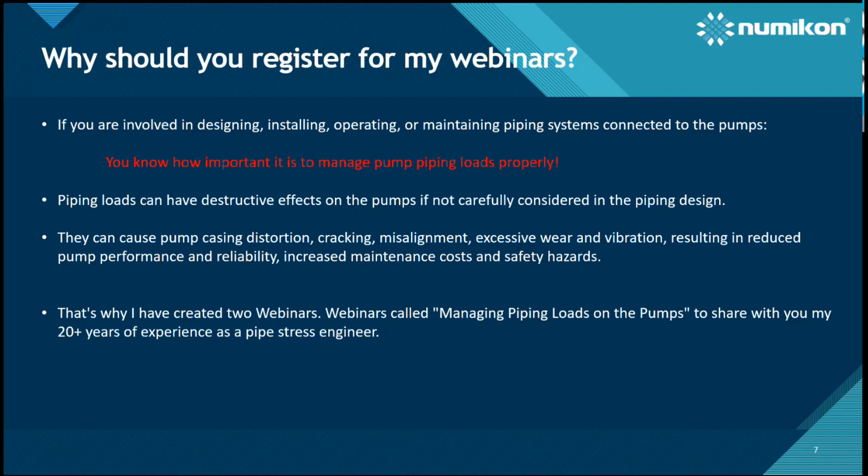Shortly about myself: in the past I worked in ABB, Alstom, and the Croatian company Končar. Since 2007 I'm running my own company called Numikon. My colleagues and I work together on a lot of projects for different international companies such as GE, Siemens, the Swedish company AFRY, the Italian company Danieli, Inca Fixing Systems from Turkey, Innospring from Switzerland, TÜV Nord Adriatic, and a lot of other companies — I mentioned only the most important for us. I'm active as a trainer for different trainings related to piping design and pipe stress analysis. I'm also a trainer and instructor for Caesar 2 trainings, from static to dynamic, and also for some advanced Caesar training. And I also provide technical support, consulting, and coaching for Caesar 2. So these are my, let's say, my background.

In these webinars, what I'm preparing for you, what you will learn: you will see what piping loads are and why they are important for pump performance and reliability. You will see different sources and types of piping loads acting on the pumps. It's not only one type of load - there are different types, sometimes acting against each other, which additionally complicates our life. We will see how to perform pipe stress analysis using different input data analysis software.

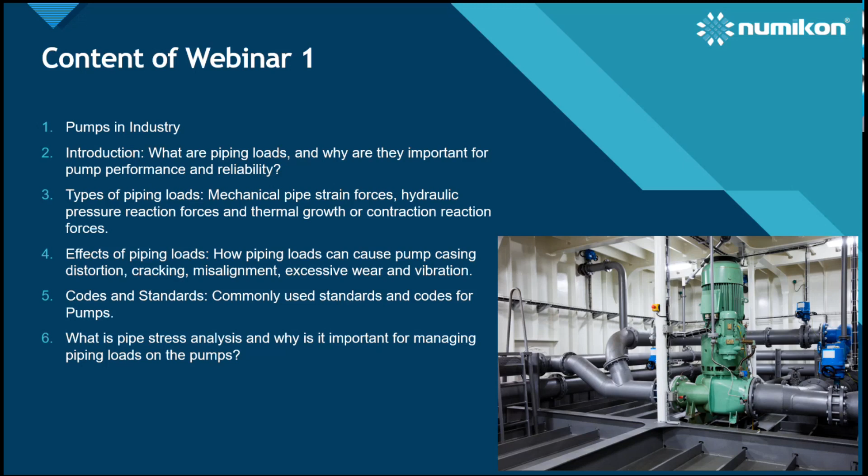Also, we will talk about what pipe stress analysis is and why it's important for managing piping loads on the pumps. So this is, let's say, a rough content of the first webinar. In the second webinar, we will see methods of piping load analysis, how to use piping analysis software to calculate piping loads and to evaluate the loads.

One thing here is the following: I will talk about why pipe stress and flexibility analysis is important for the piping connecting to the pump, even if the piping or the medium inside the piping has very low temperature. Why is this important? Because pipe stress and flexibility analysis will help us calculate and get an idea about the loads which we will transfer to the pump.

Nevertheless, temperatures are very low, and maybe a formal analysis using some kind of software is not required. But at the end, pipe stress and flexibility analysis is the best way to get more realistic results on the connections. Of course, to get more realistic results on the connection, we also have to take care how we make the simulation, how we prepare the model, how we build the load cases, etc.

So all this is what we will talk about. Also, I will talk about strategies for piping load management: how to use proper piping alignment, how to properly support, how to properly restrain the pipe, what to do when we have to use expansion joints or flexible couplings, and things like this. All of this will actually be covered with some examples.

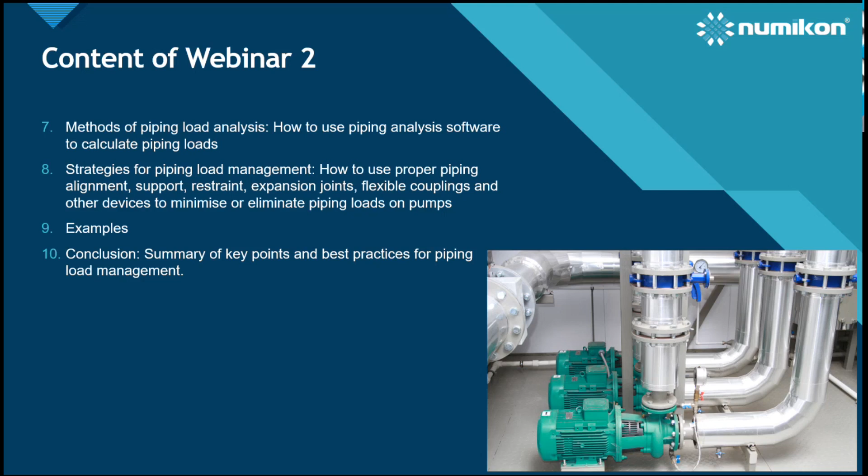And in conclusion, there will be a summary of key points and best practices for piping load management. Okay, so the question is: why is checking the pump nozzle load important?

Just to talk a little bit about the importance of checking the loads. When designing or calculating piping systems, stress verification and comparing calculated stresses with maximum allowable values is not the only thing we have to do as a pipe stress engineer. So stresses are not the only thing we have to do. We also have to check displacements, and we have to check loads on supports, but also, in this case, loads on the pump.

So here on this sketch, you can see that we have some margin, and with all the results we have to stay within it. If we satisfy, for example, stresses and loads, but we did not check displacement, we cannot say we did our job. Or maybe we satisfy the stresses and displacement, but we have to satisfy the loads too. So we can say the pipe stress analysis is complete only if we satisfy all three of these things.

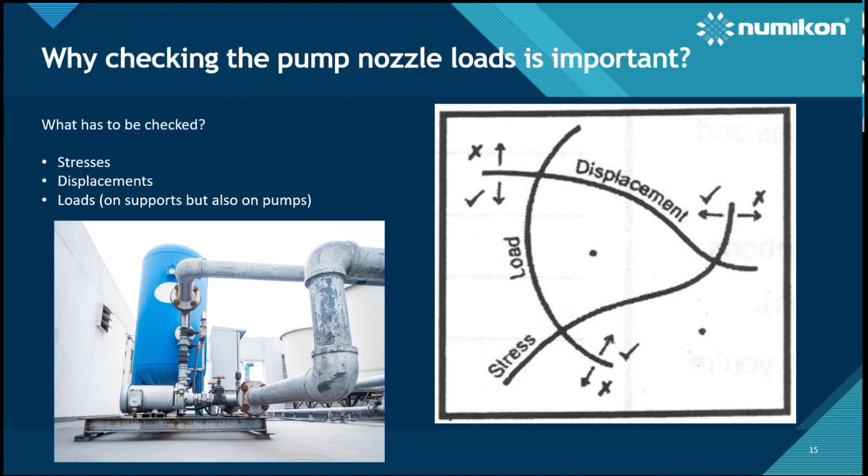Checking the load on the connecting pump puts, in most cases, a more significant challenge ahead of us than solving just stress problems. Experience has shown that in most cases we have more issues meeting the requirements for the maximum allowable loads on the pump than solving the stress issues. We will see an example. Maximum allowable loads, as I said before, are defined by different standards and codes, and also by pump manufacturers.

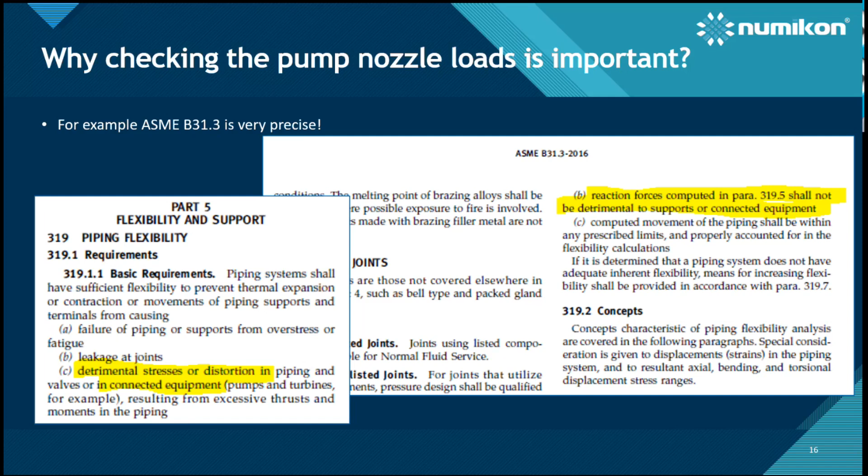Also, the reason we have to check the pump loads is that, for example, ASME B31.3 is very precise with the requirement that we have to take care about reaction forces on the connections, on the supports, but also on connected equipment. So piping standards are pretty precise regarding what we have to consider and what we have to check.

As I already said, load verification poses a greater challenge to the designer than stress verification. As a good example, we have one table here, which is prepared based on API 610, a standard for centrifugal pumps. And what we have in this table is for different pump connections.

So for pipe size or connection size, we have 3-inch, 6-inch, and 16-inch connections. And here, what we have are the stresses in the piping when we apply the maximum allowable loads defined for certain connections. So for example, if we have a 16-inch pipe and we perform the analysis applying the maximum allowable load on the connection, what we will find is that the piping stress is only 7% of the allowable.

So you can see that the piping where we are, even though we have very low stresses, we are already at the edge of allowable loads. This is a good example of why checking the loads on the pump is important, because stress results alone don't give us enough information to say if this is okay or not, since we will have more problems solving load issues than stress issues.

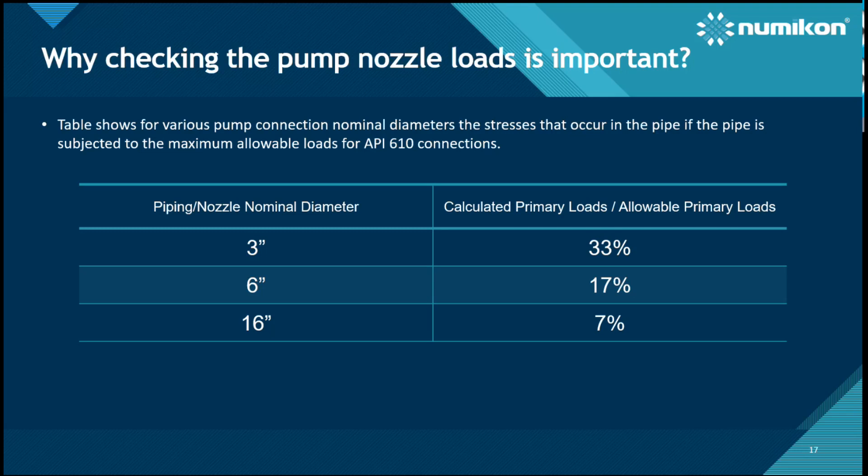Let's see this through one example. We have a simple example of pump piping connected to the pump, and also on the other side connected to a vertical vessel. If we perform the analysis and check the stresses, we can see that the maximum sustained stress is around 5% of allowable, and maximum expansion stress is around 29-30 percent.

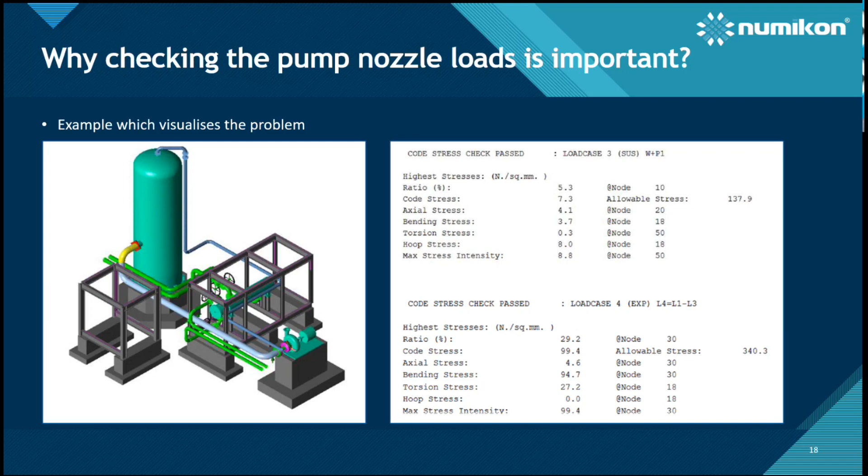But when we check the loads on the pump, we see that we have a problem. If we perform a load check for this same piping according to API 610, it shows that despite the stresses being very low, the loads are far above the permissible values. Checking the forces, we are 6 times above allowable, and checking the moments, we are more than 12 times above allowable. It's clear we cannot say this piping meets all requirements if the loads on the pumps are too high.

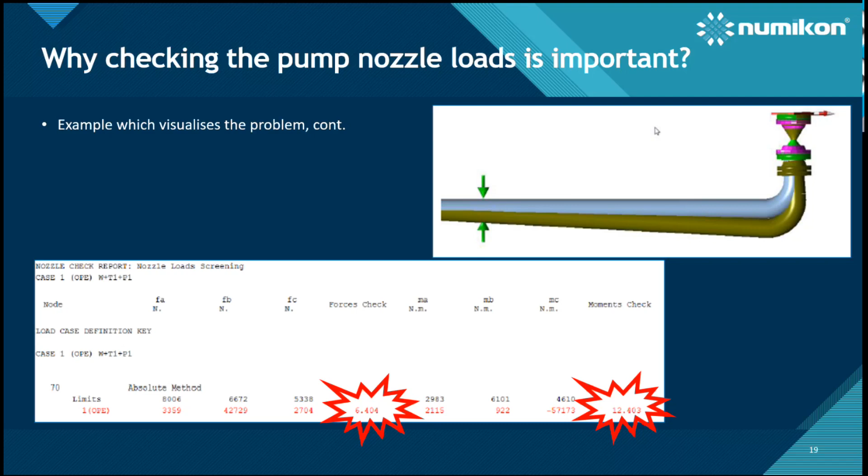It's important to mention that this check is only a screening check, it is not a real API 610 check. You have to always be careful about what the requirements and checks are based on different standards. This kind of checking is just a screening check, so if you want to make a proper analysis, you have to use the appropriate standard.

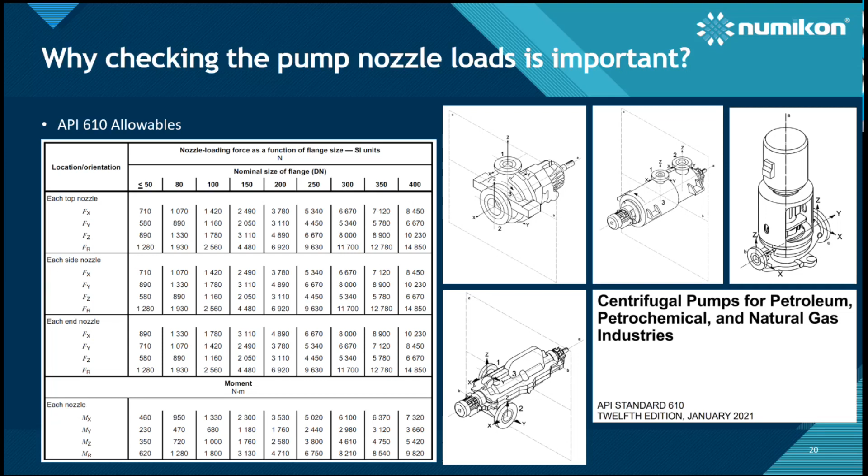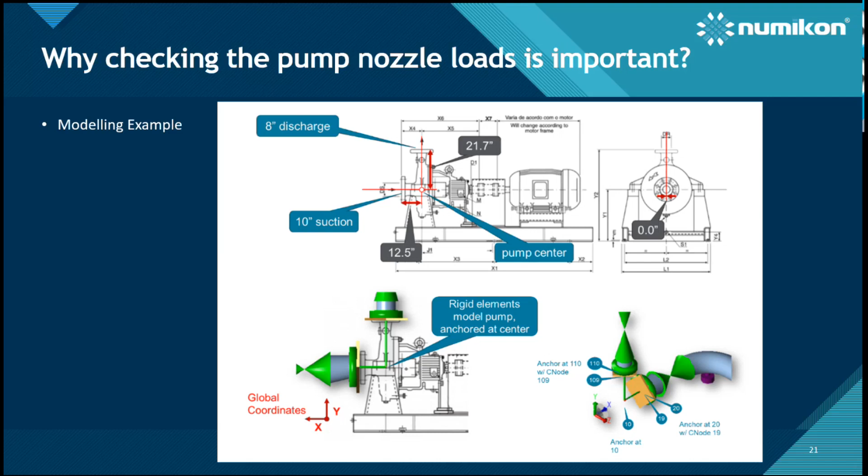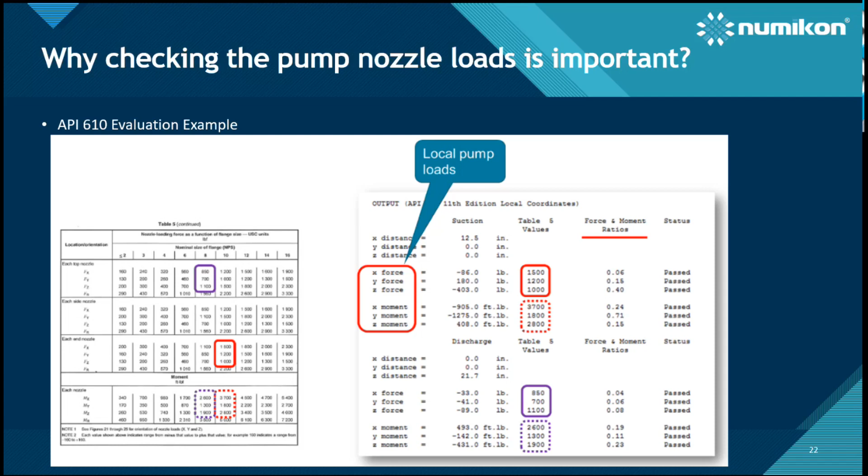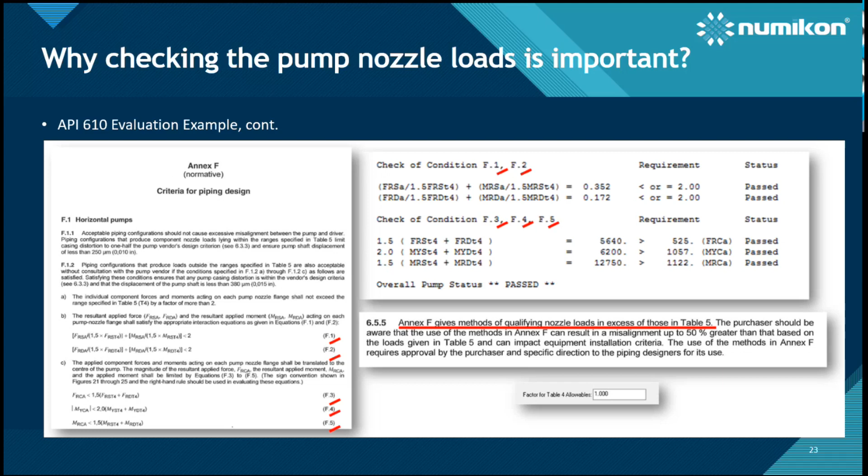So this is shortly about why it's important to evaluate piping loads.